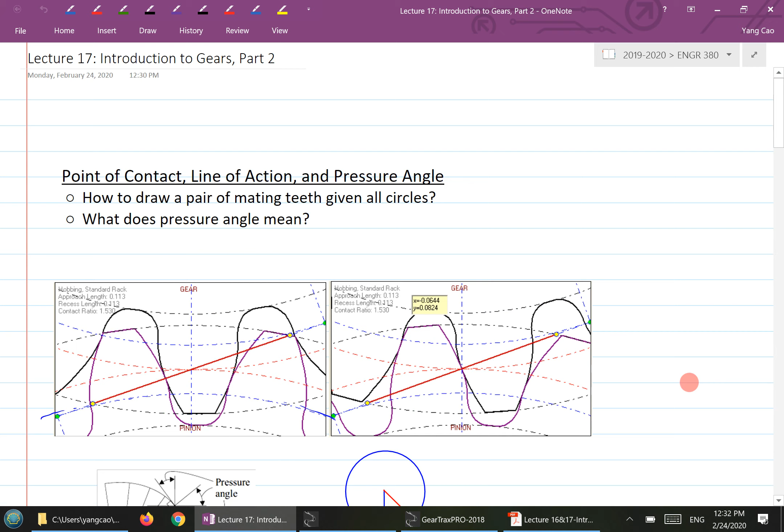Okay, so let's continue the lecture here. We started on introduction to gears, so let's finish this part - continue the introduction and wrap that up.

We talked about the specialty of the gear, because the profile of the gear is the involute profile, and we also talked about a lot of terminologies associated with the gear. This week's tutorial, the TA will help you go through an exercise which is basically to create a spur gear using SolidWorks, so you can familiarize yourself with all the different types of terminologies associated with the gear.

The other thing we'll continue with is the point of contact, line of action, and pressure angle. From this diagram, it's a little hard to tell, but there are 2 red circles - these are basically the pitch circle, and this line here is called the line of action, if you recall. This line of action is tangent to the 2 blue circles here, which are the so-called base circles.

Base circles are the circles where your involute profile will be generated. The involute curve is generated based on this blue circle, and the angle between the line of action and the horizontal line - which we sometimes call the pitch line - gives you the pressure angle. This angle here is the pressure angle. Geometrically, the pressure angle could actually be any number.

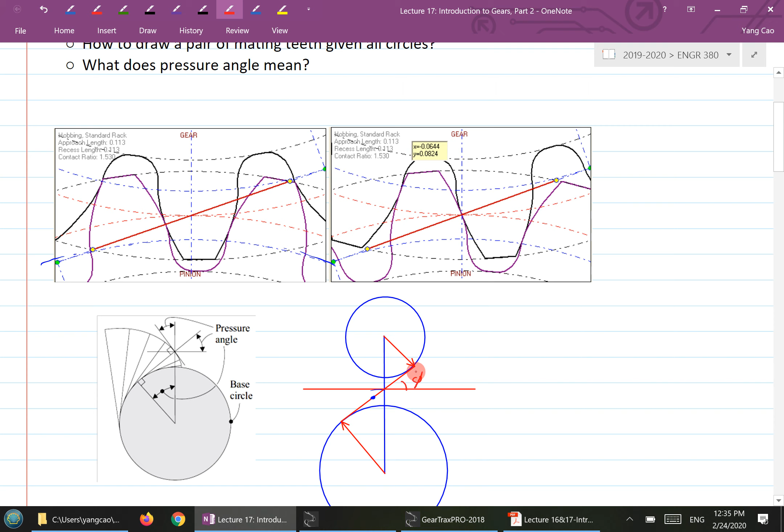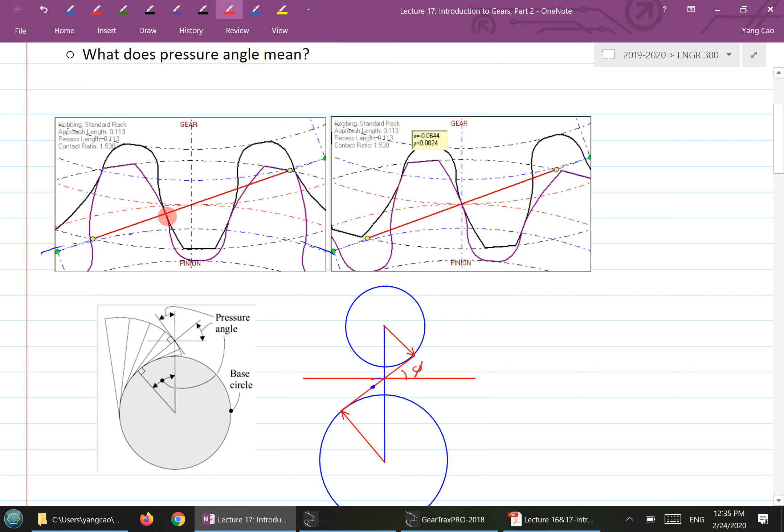Now the other thing is the line of action. Point of contact means where the contact point is between two pairs of gear teeth. The nature of the involute guarantees that the point of contact will always be along this line of action. So basically this point here, as the gear moves, will always be along this line of action.

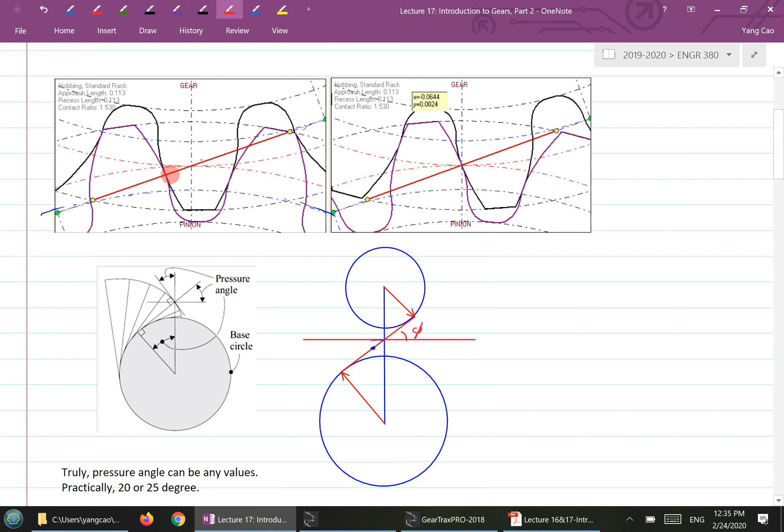So I can show you a little animation here. This is a software; unfortunately, it's not free. So there's this pinion and a gear here. You can observe carefully when the pinion is driving the gear, this contact point will always be along this line of action here. So as it moves, that point of contact is always along that line of action.

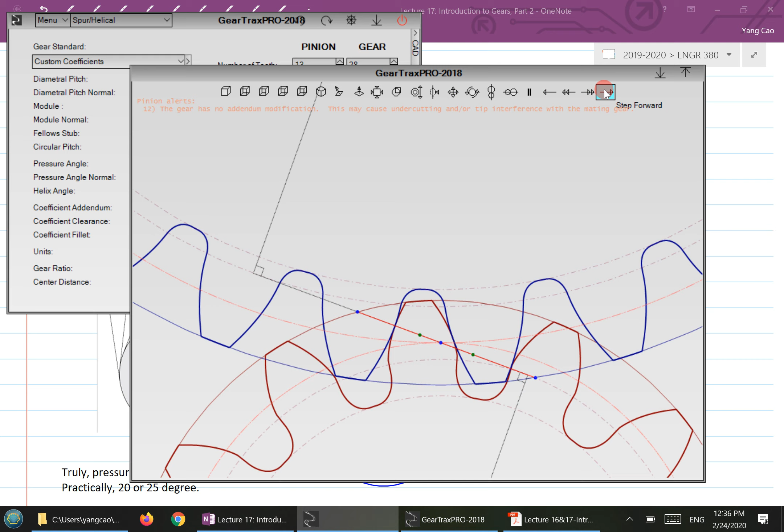So that's basically the nature of the involute profile. It guarantees that the contact point will always be on that line of action. Okay, so these are basically the parts. Another concept is called contact ratio. So when you design a gear, bear in mind this important parameter, the contact ratio.

The contact ratio, using symbol mc, is a measure of the average number of teeth that are in contact. So what does that mean? If you look at this case, we have diametral pitch 10, number of teeth 13 for the pinion, and the gear is 28. So right now at this moment, how many pairs of teeth are in contact? There's definitely these two pairs here. So there's basically more than one pair of gear teeth in contact, right?

So that's the number representing contact ratio. Generally, you want this number to be more than 1.2. If it's exactly 1, it basically means you only have one pair of gear teeth in contact, always. So how do we quantify this?

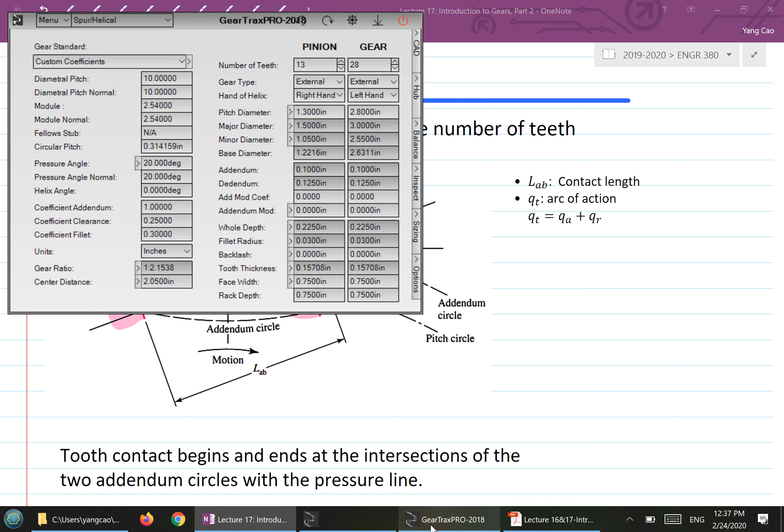Before we give you the formula here, the other thing I think you also need to, maybe I'll talk about this next. Okay. Well, let's look at this for now.

There's an important point here: the intersection point between this big circle and the pressure line, the line of action. Do you remember what this circle is called? Addendum circle. Excellent. The addendum circle is the outermost circle for a gear, and it represents the ending of the involute profile. That's where your gear tooth profile ends.

So the intersection between the addendum circle and the line of action, which is the blue dot here, represents either the beginning or the ending contact point between these two gears, the pinion and the gear. So you can take a look carefully here. For example, at this moment, that's where they start to disengage. And this blue dot here will be the point when they start to engage.

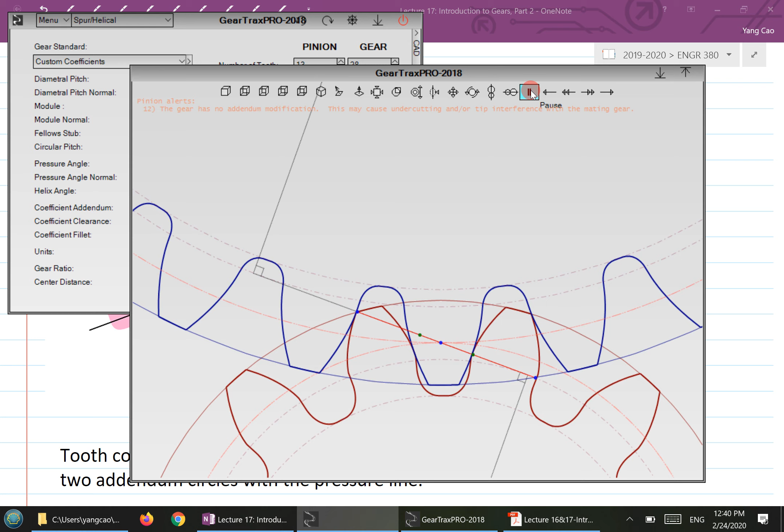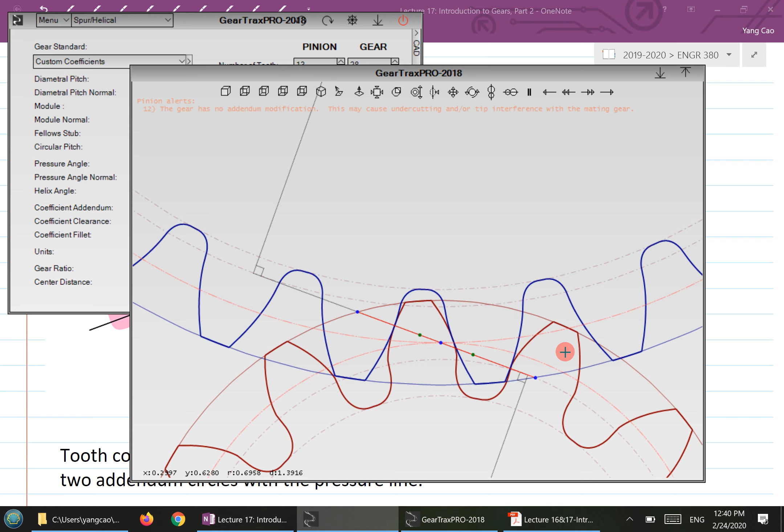So the engaging and disengaging points are the intersections between the addendum circle and the line of action. This is the intersection between this addendum circle and this line of action, and this point is between the gear's addendum circle and the line of action. So these two points determine the engaging point and disengaging point.

So how do I measure the contact ratio? This diagram more or less shows you what I said. Points A and B are the engaging and disengaging points. From A to B, the distance is defined as the contact length, LAB. The other important parameters are the so-called arc of approach and arc of recess, qa and qr. When you add the two arc lengths together, you get the so-called arc of action, qt.

So this QT here, basically MC is defined as QT over small p. Okay? Small p is the circular pitch. So circular pitch is an important parameter, right? When you design a gear, you have a diametral pitch, you have a circular pitch, they're related. Right? So MC is defined as basically this QT over the circular pitch.

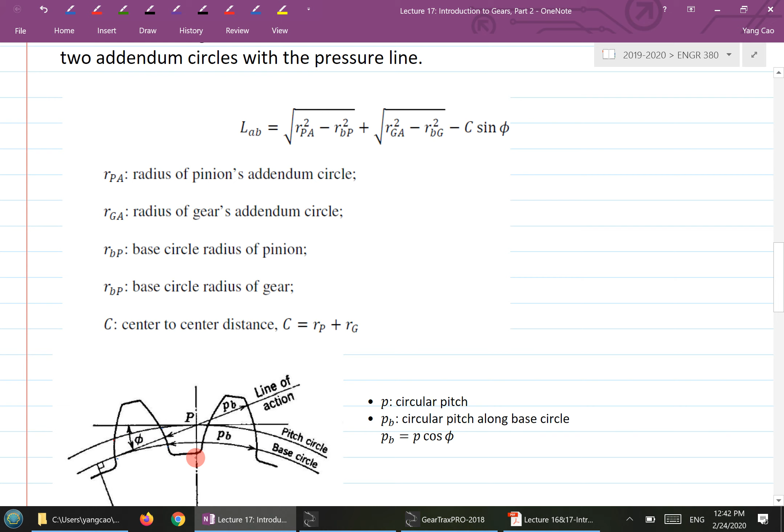Okay. So I think I have the definition at the bottom here. So P is the circular pitch along the pitch circle, okay, from here to here. Okay. You can calculate this line of action LAB using this formula. Without derivation, you can look at my lecture notes. I do actually have a detailed derivation of how LAB is derived. It does require a little bit of geometric background.

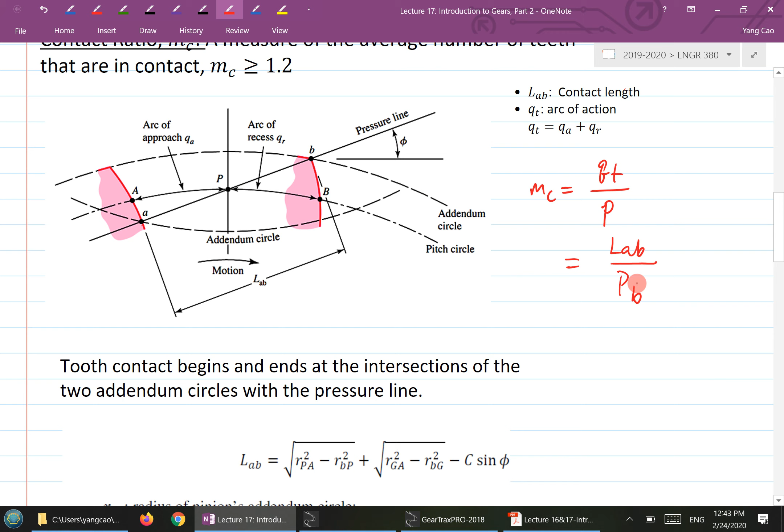Okay. So this is the LAB, which is related to, for example, the radius of the pinion addendum circle, radius of the gear's addendum circle, radius of the pinion base circle, and also the base circle radius of the gear. Right? And C is the center-to-center distance, and phi is the pressure angle. So you can calculate LAB using those parameters, and we can prove that the contact ratio can equivalently be calculated using LAB over PB, and PB here is the circular pitch along the base circle.

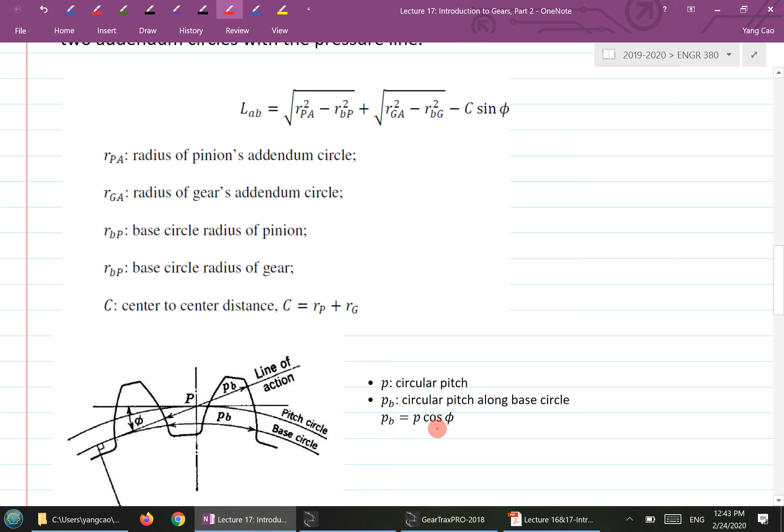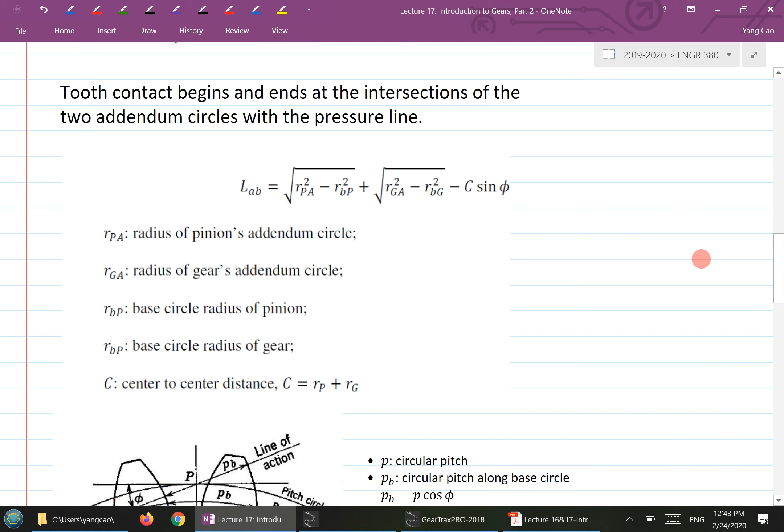Okay. So those formulas, you don't have to always memorize these things. Later I'll give you a template which has already coded all the formulas into it. But it's good that when you look at the formula for the cell, you know where they are from, right? Yeah. So this is the contact ratio, all right? And when you design a gear, you can list the contact ratio, and what you try to avoid is 1, right? As I said, suggested to be above 1.2.

The other concept is called interference. Okay, so what is interference then, right? So let's go back to this animation here. Now I'm gonna increase the number of teeth a little bit, okay, to 16. So now let's observe one thing here. Look at this line of action, which is tangent to the 2 base circles. This is the base circle for the gear, and this is the base circle for the pinion. And the tangent point one is over here, and the other is over here. So that's basically the nature of the line of action, which is tangent to the two base circles.

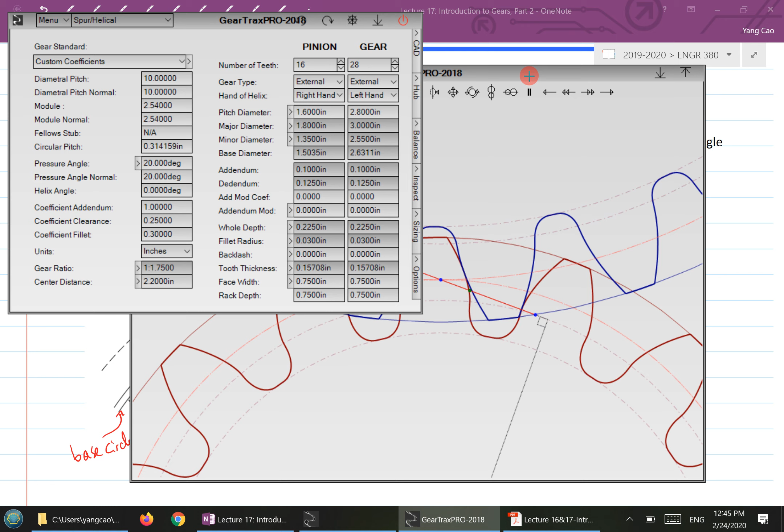And now the two blue dots, as you recall, refer to the starting and ending engaging points, right? Right now, the two blue dots are well within the two tangent points. And we call this the situation where you will not have interference, because when the two blue dots are within the two tangent points, whenever the two gear teeth are engaged with each other, the engaging points are always on the involute profile, which is exactly what we want. You want involute to engage involute. You don't want involute to engage non-involute. So when does that happen, when involute engages non-involute?

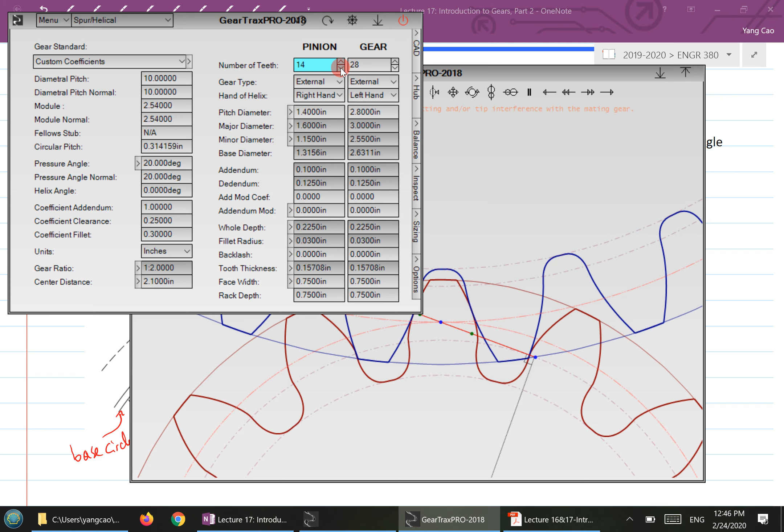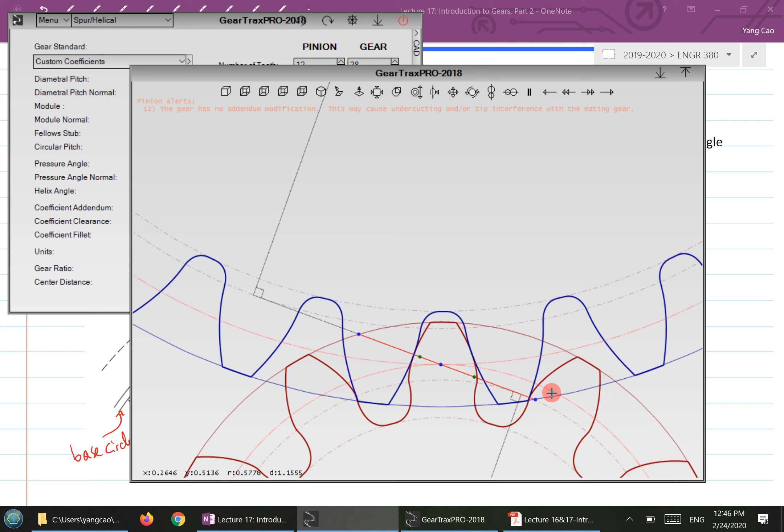If I reduce this one to a certain number, say 12, okay? Now if you watch carefully, where do these blue dots go? They go outside the tangent point now. So at certain points, somewhere around here, maybe a little bit more than this. Yeah, so let's say around here. This part, the blue one, is still involute. But the brown color here technically is not going to be involute anymore, because this is the base circle. Anywhere below the base circle is actually not an involute profile.

So when you draw a gear, anywhere below the base circle, you actually just draw a straight line all the way to the radius. So basically what's going to happen at this location is you have an involute portion of the curve engaged with a straight line, which is the non-involute portion of the curve. So that's what we call interference.

You have all gone to the dentist, probably not all of you, but anyway, you have probably had a filling in your teeth, right? What's the last step the dentist will do to you?

They'll put a blue color of paper and then ask you to bite it, and they look at the color, and then they grind it a little more, right? And ask you to grind your teeth, see if you feel comfortable or not, okay? Until you feel comfortable. So when you're not feeling comfortable, exactly what happens there is interference.

Okay? So part of your involutes is engaged with non-involute. So that's called interference. So what happens when you have interference? The involute portion will always try to dig into this non-involute portion. And as time goes on, basically you have a grinding noise, or you have uncomfortable feelings. That's exactly why, when you design gears, you need to avoid this interference.

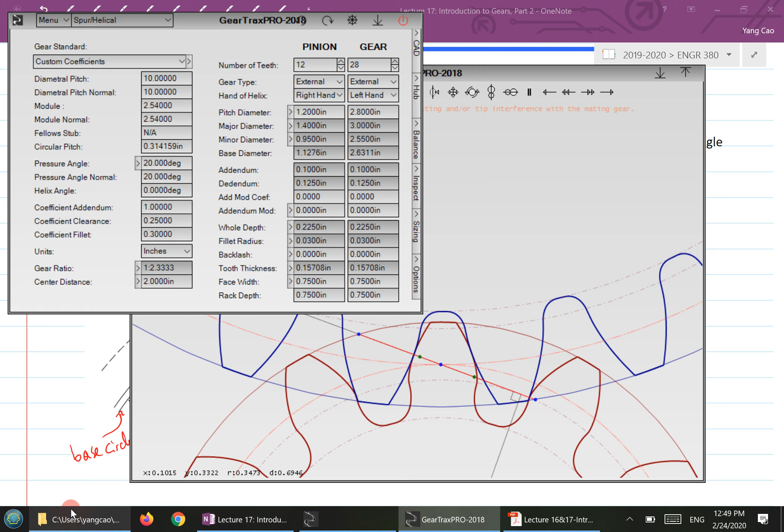So interference is important because you have to avoid it, but you have to know under what situation you need to avoid interference, right? So there are a number of things that you have to be very careful with when you do the calculation for the gear, which is essentially trying to avoid the interference. This is the same demonstration here, but I'm going to write down a few formulas so that you know when you should avoid interference.

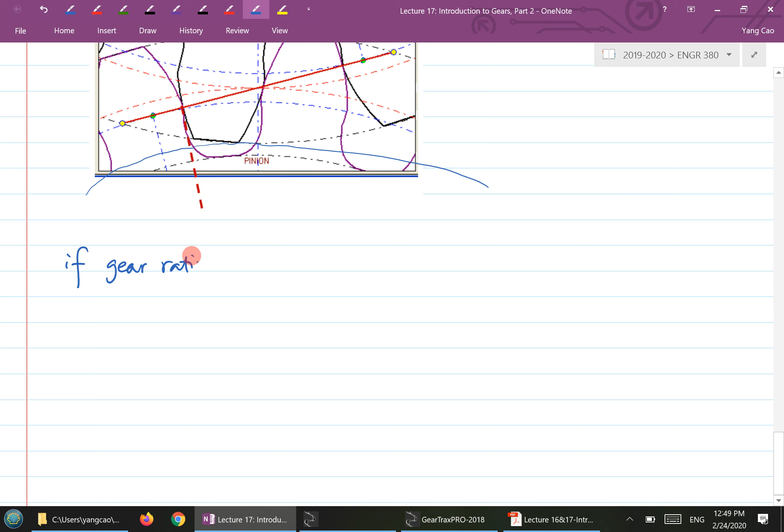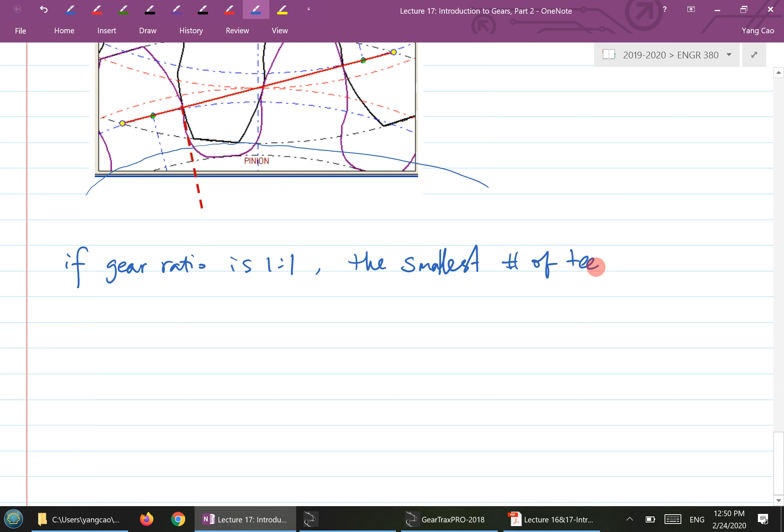If gear ratio is 1:1, then you should know that the smallest number of teeth for pinion is this formula here. In this formula, there are two parameters. One parameter is the pressure angle phi. The other parameter is this parameter k here. So k, you take it as 1 for full teeth.

Okay. There's another type of teeth called stub teeth. Stub teeth is a little bit shorter teeth. Full teeth is the standard size of a teeth. For stub teeth, I can't remember. For stub teeth, k should be 0.8. I can't find it anymore. Okay, you can check the notes. There's another one here for the stub teeth.

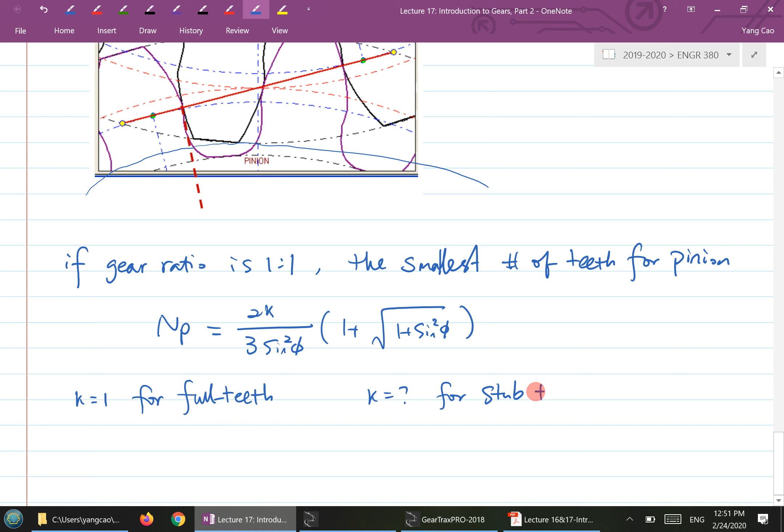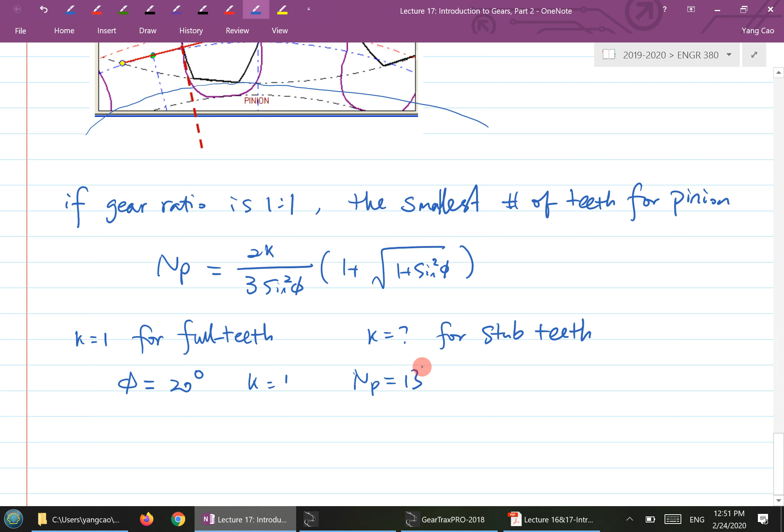So if I plug in, for example, phi equal to 20 degrees, and then k equal to 1 into that, then you'll be able to calculate the NP here, which will be 13. Okay. So this is for gear ratio 1:1. And of course, we typically deal with a gear ratio more than 1:1.

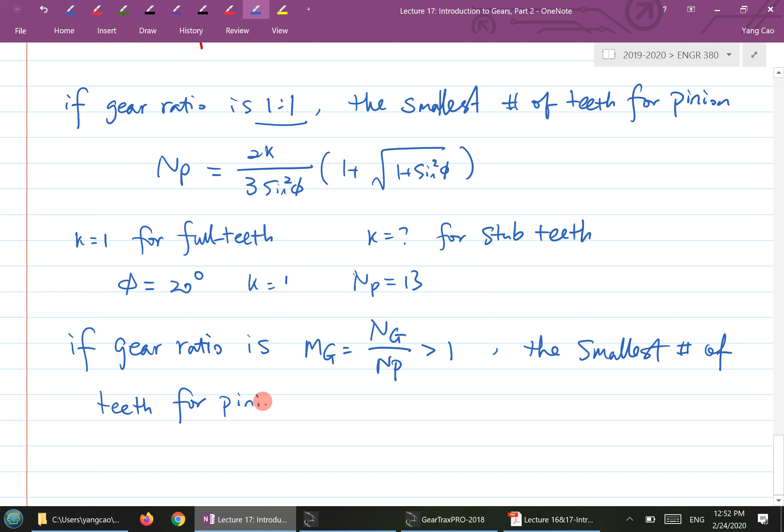So if our gear ratio is defined as the gear teeth number over the pinion teeth number, and of course typically is greater than 1, then we have a different type of formula now. The smallest number of teeth for pinion. So we're talking about here is the smallest one without interference. And this time the formula is changed to

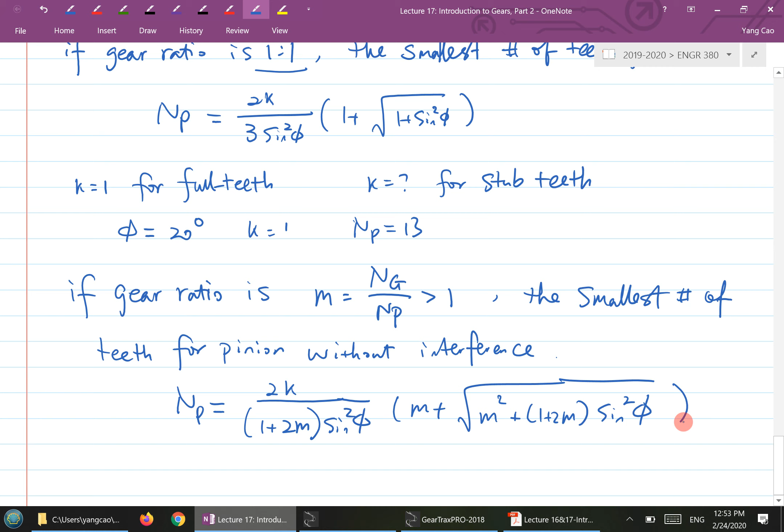so let's just use m here instead of mG. Okay, so it changes to this one here. It's different from that, but this one includes that formula, right? So that one is a particular case of this one. If you set m equal to 1, you should get the same thing.

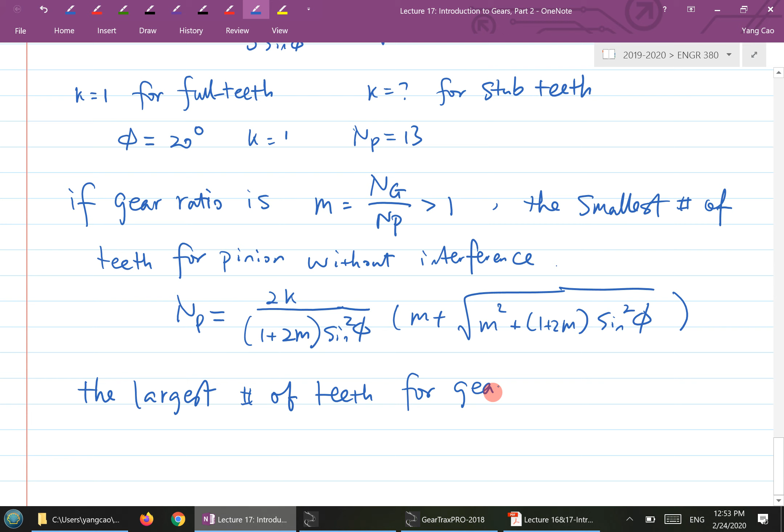And the largest number of teeth for gear, so not just the smallest number of teeth for pinion, but also the largest number of teeth for gear, is NG equals NP squared sine squared phi minus 4k squared, over 4k minus 2NP sine squared phi. So these two formulas, you use them together: what's the smallest and what's the largest number, to avoid interference. So let's see a few examples here.

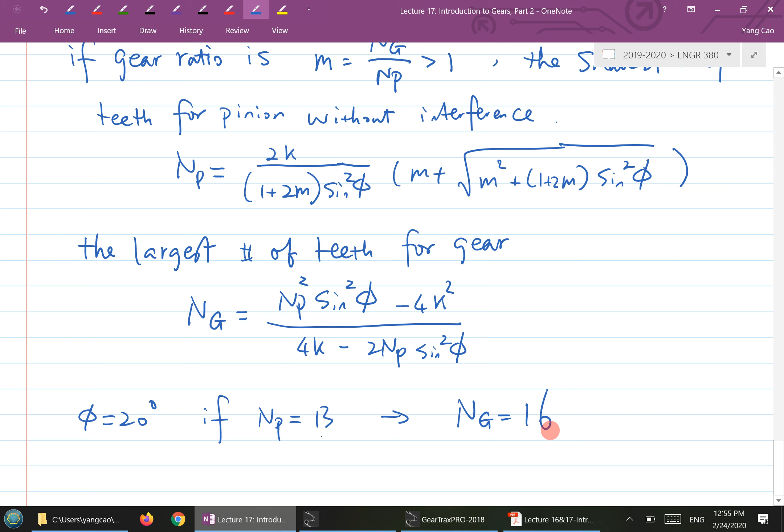For example, if you use pressure angle 20 degrees, and you choose NP equal to 13, then you get NG equal to 16. So you plug NP in here, you get NG equal to 16. So basically, when you choose the number of pinion teeth as 13, the largest number of teeth for gear is 16. So in this case, your largest gear ratio is 16 over 13. Now if you choose NP equal to 14, then you get a different number, 26, right?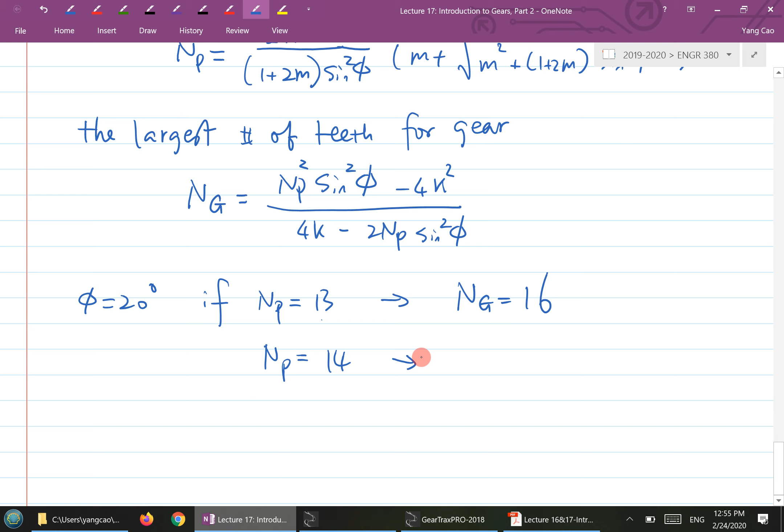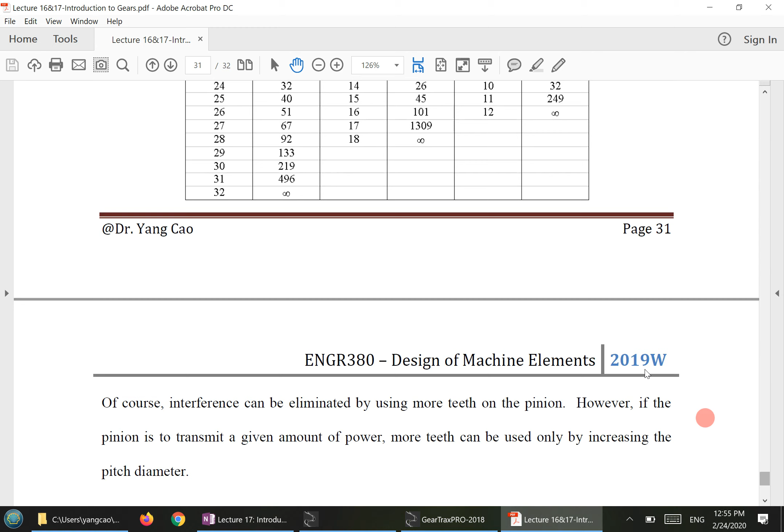So this is essentially what's in the table in the lecture notes, also in the textbook. And you'll have this table here: 14 to 26, 16 to 101. And when the pinion teeth is 18, the largest number of teeth for the gear can be infinite. So basically when your pinion number is 18, your gear ratio can be as large as you want. So you're not going to have any interference at all, essentially.

Okay, yeah. But there's always a trade-off, right? When you have more teeth for a gear, then it's getting more expensive. So it's always a trade-off. Okay.

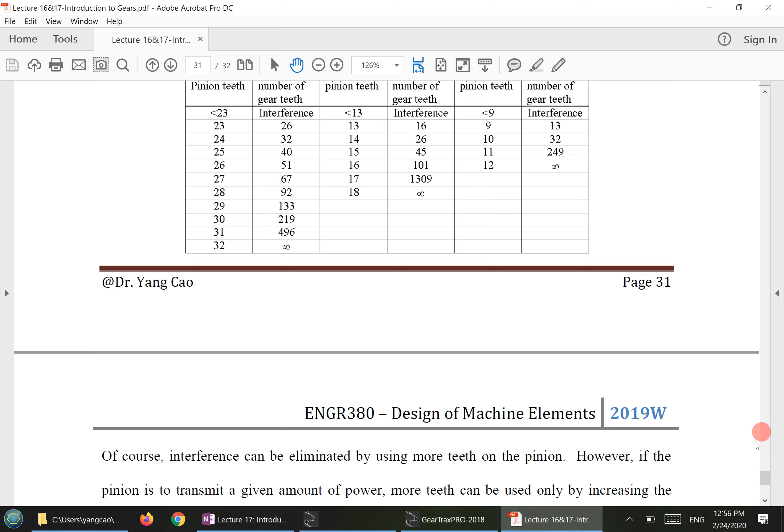So what would be a possible way of avoiding this interference problem? There are a couple ways you can do that. I'll just show you the picture here. Since interference happens only when the involute portion is in contact with the non-involute portion, then if you can have as much involute curve for the tooth profile as possible, you'll have less chance of interference.

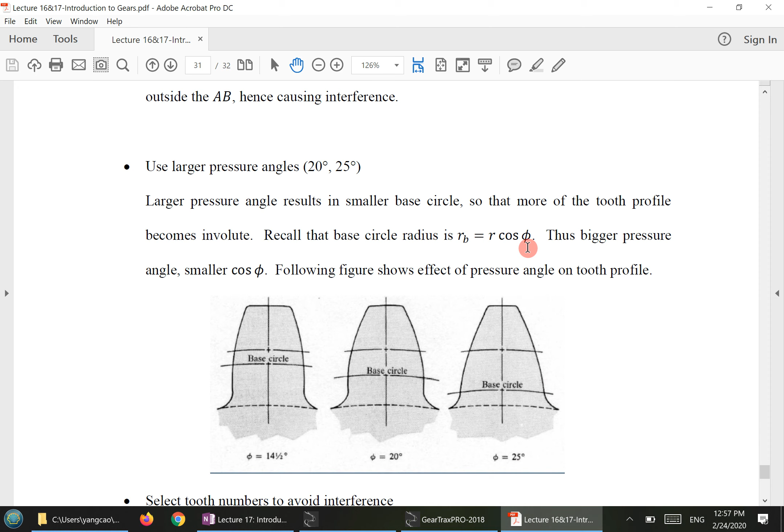So this is the effect of pressure angle. As you have a larger pressure angle, the base circle becomes smaller. That comes from this formula: the base circle radius equals the pitch circle radius times cosine of the pressure angle. So the bigger phi is, the smaller the base circle radius is. As you can see, when you have a 25 degree pressure angle, you have more involute portion than with 20 or 14 and a half degrees.

So basically a bigger pressure angle will give less chance of interference. And then the other thing, which we'll come back to later, is you also want to avoid too few number of teeth. When N is very small, the diametral pitch will be small. If diametral pitch is small, then the addendum A, which equals 1 over capital P, will be too big. The addendum refers to the length from the addendum circle to the pitch circle. So what does it mean for A to be too big? It basically means your teeth are too big, like sticking out a very long tooth, which is not that good.

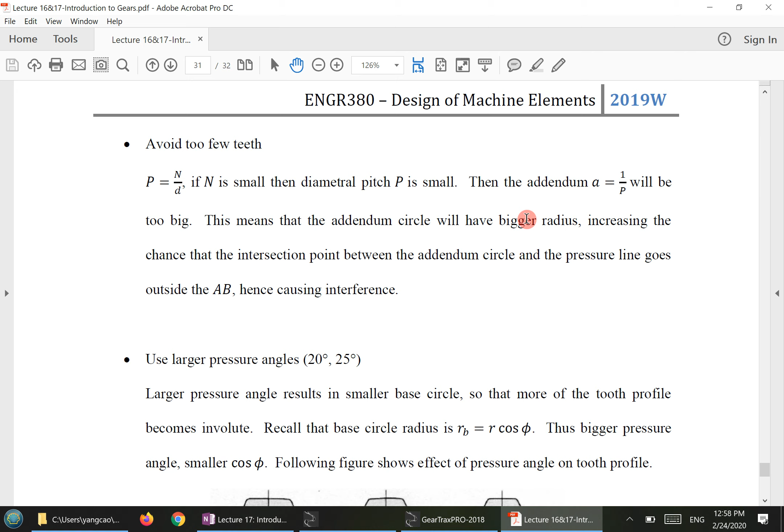But it's good for some other effect though. We'll look at this effect later in more detail when we do the gear design. But these are the two things you can try to use to avoid interference.

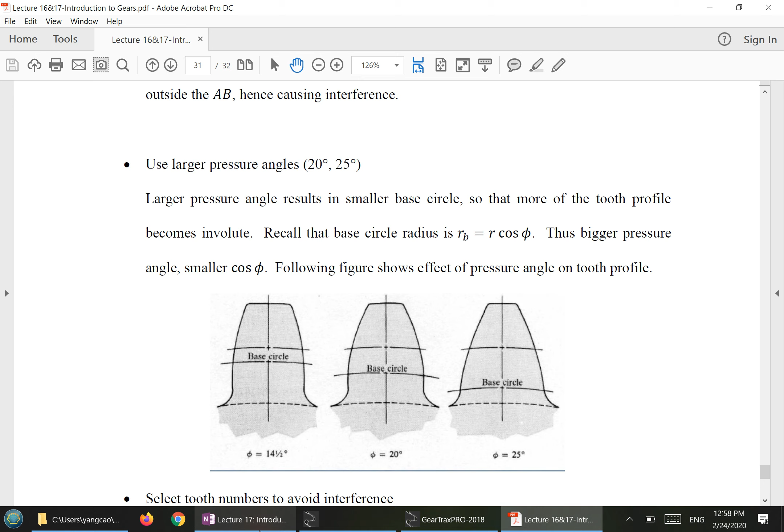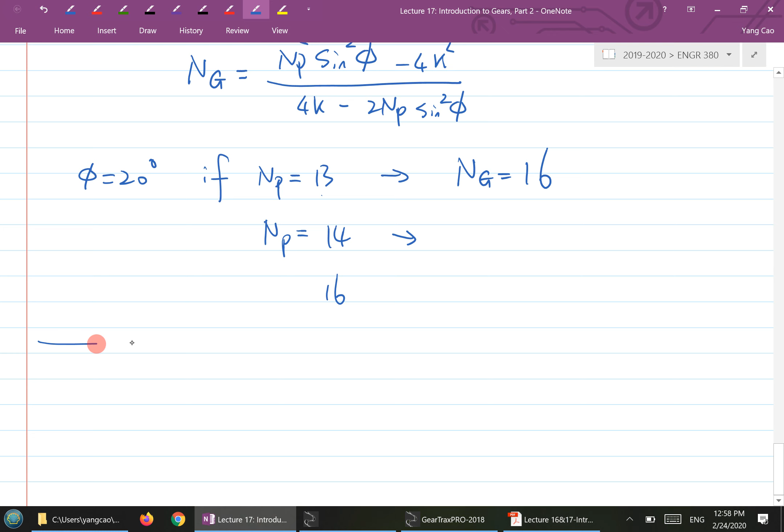All right, so that's some of the terminology. Let's continue on the introduction here. Now I'm going to look at gear train and gear forces. Let's look at the gear train and gear forces.

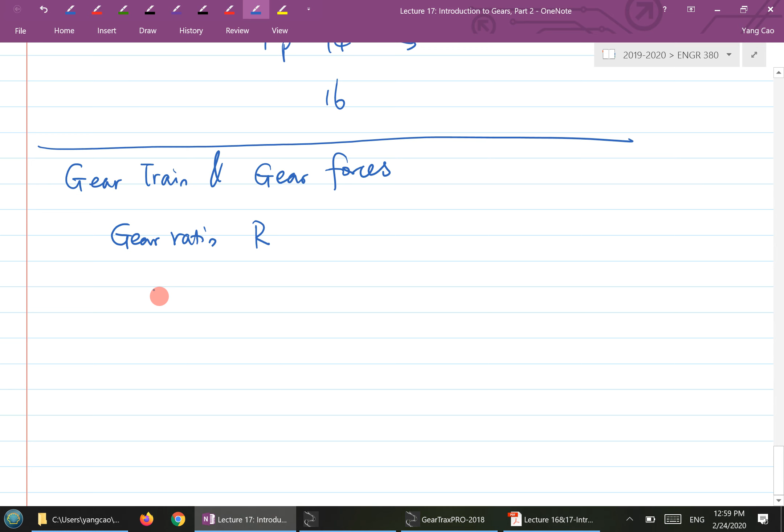So first, a very simple concept: gear ratio R. Now when we talk about gear ratio R, you have to understand that in different contexts, people sometimes use R differently for gear ratio. But in essence, you calculate gear ratio R using either the angular velocity ratio, or the ratio between the number of teeth on the two gears, or the ratio of the radius of the two gears.

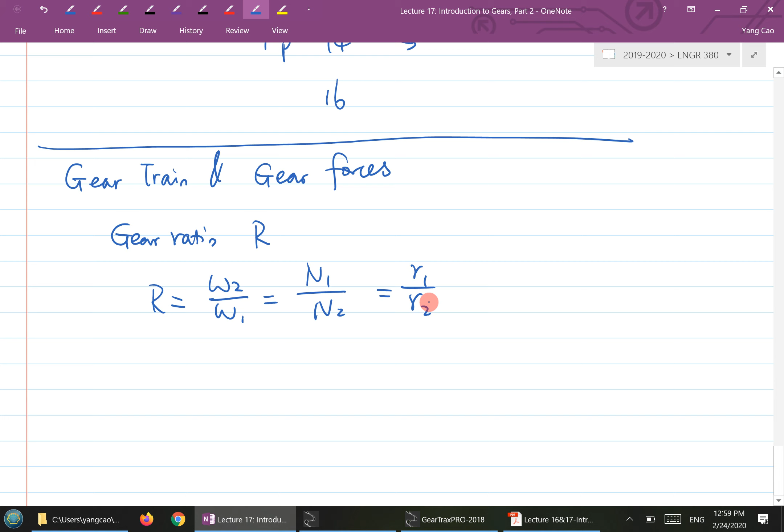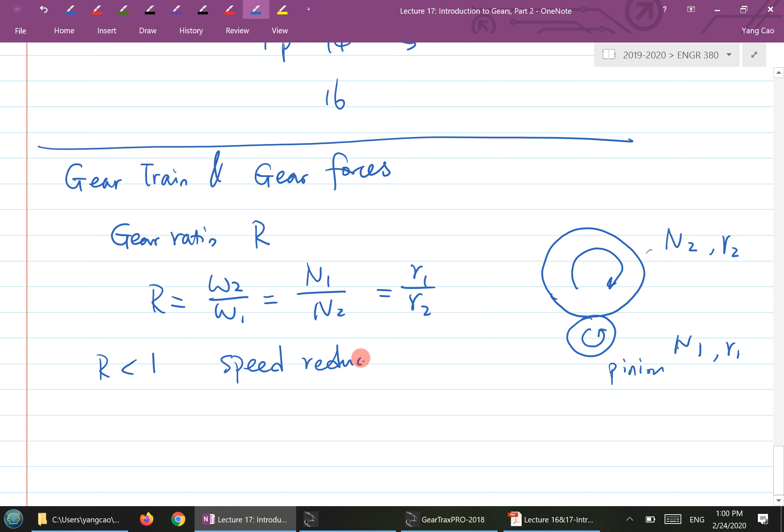When you have two gears engaged with each other, you can draw two circles. If this gear is going this way, then this gear must be going this way. So this smaller one typically drives the bigger one, the pinion drives the gear. So N1 and N2 is the number of teeth on each one, R1 and R2 represent the radius, and omega 1 and omega 2 represent the angular speed. In this case, the pinion is typically less than the gear, so R will be less than 1. That's the convention when you have R less than 1, which essentially gives you a so-called speed reduction gearbox.

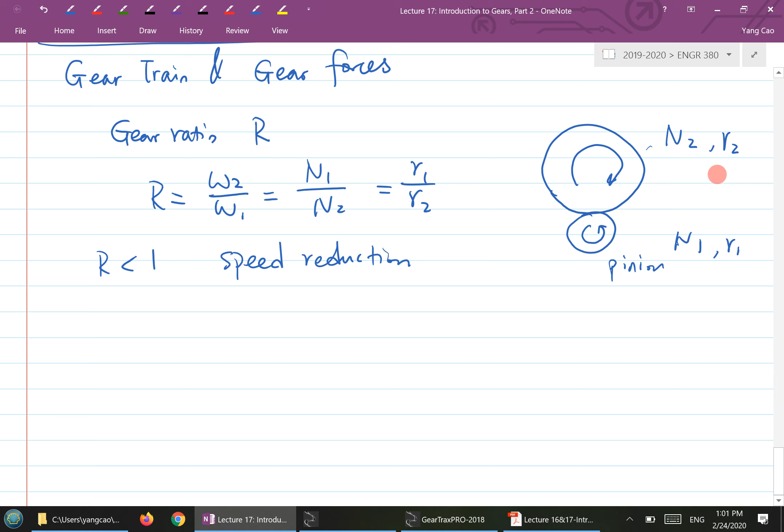However, in the automotive application industry, if you look at some of the manuals, when they talk about gear ratio, they often actually refer to the number of teeth on the gear over the number of teeth on the pinion. So it's actually R greater than 1. So just bear in mind the context you're reading.

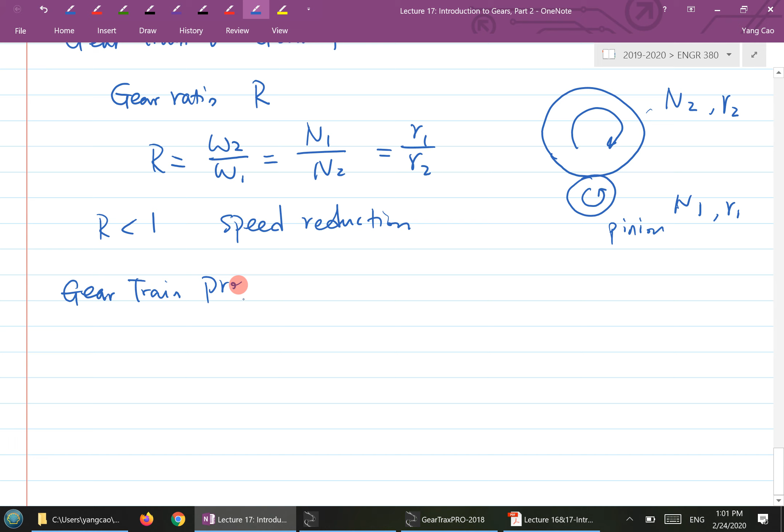So let's look at the gear train property. Very quickly look at the gear train property. I'm going to bring the picture out here.

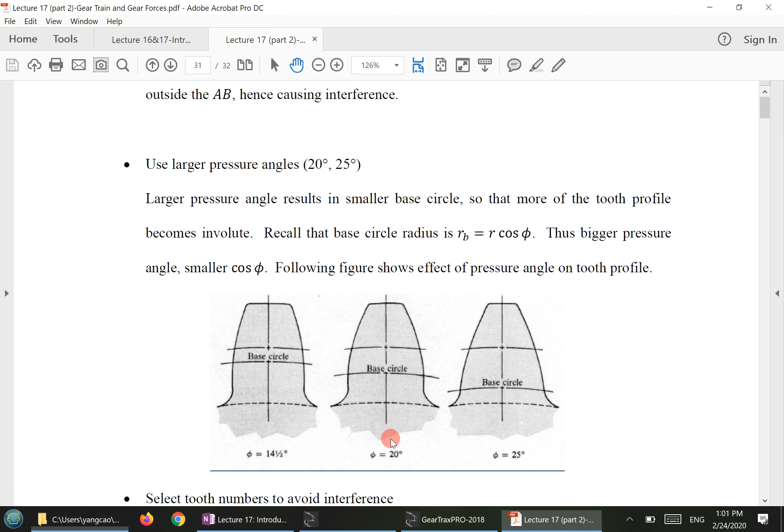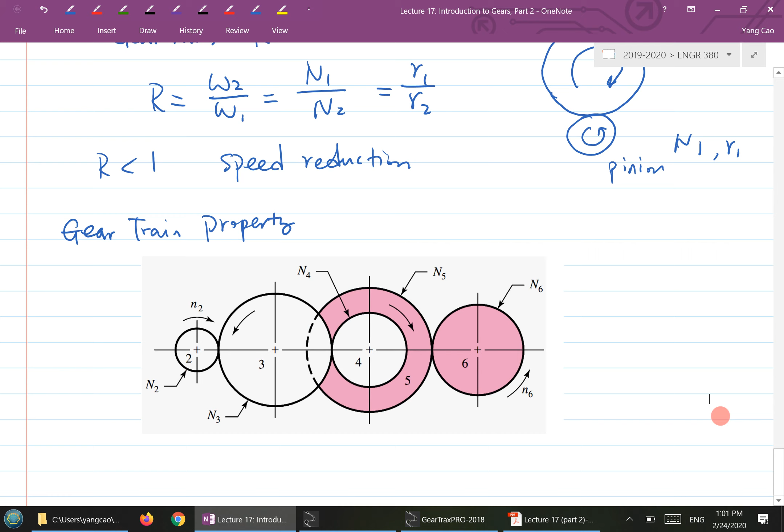So let's look at this gear train here. You can literally draw circles 2, 3, 4, 5, 6, tangent to each other, and that gives you a gear train. Some of the notation is very straightforward.

N represents the gear number, the number of teeth for each gear. n2 represents the angular velocity. Now, when you have a gear train like this, there is a value called the train value.

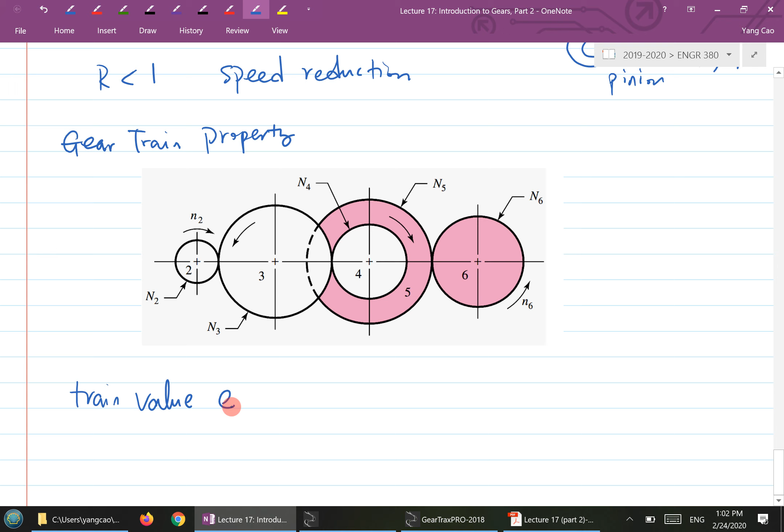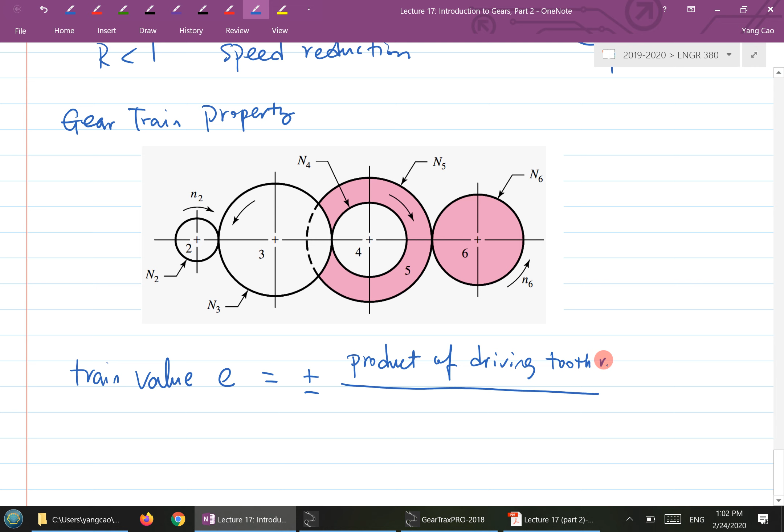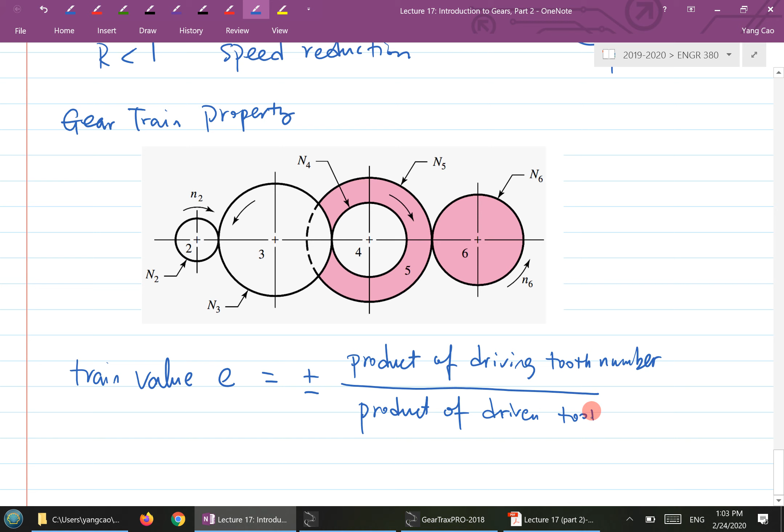This is called the gear train value, E, and E is defined as positive or negative. It's a ratio: the numerator is the product of the driving tooth numbers, and the denominator is the product of the driven tooth numbers. That's how the train value E is defined.

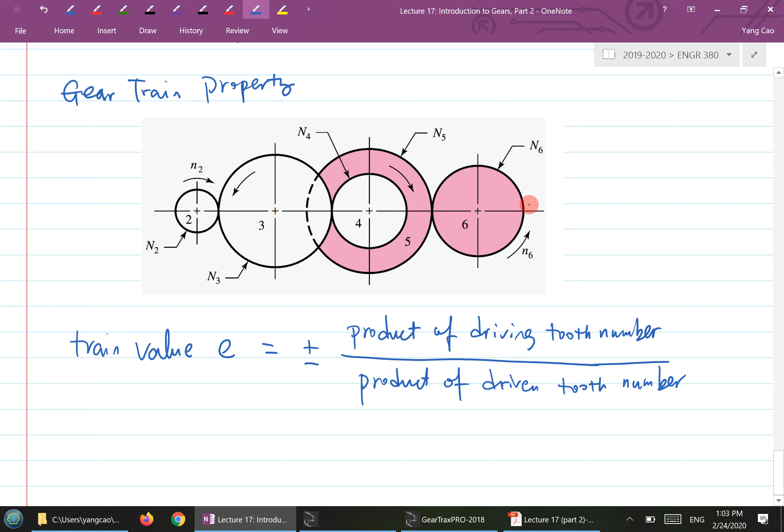Let's take a look at this particular example to find the E value. Using this formula, we need to find which gear can be categorized as the driving gear. Gear 2 drives gear 3, and 3 drives 4. Gear 4 is not driving anything, but 5 is driving 6.

So the product of driving gears will be N2 times N3 times N5. Now, gear 3 at here is not only a driving gear but also a driven one, so N3 appears again in the denominator along with N4 and N6, which are driven gears. So that's the E value.

What about positive and negative? You add that on by looking at the direction of the input and the direction of the output. If the output direction changes from the input, you put a negative sign. In this case, the two directions are different, so the value is negative.

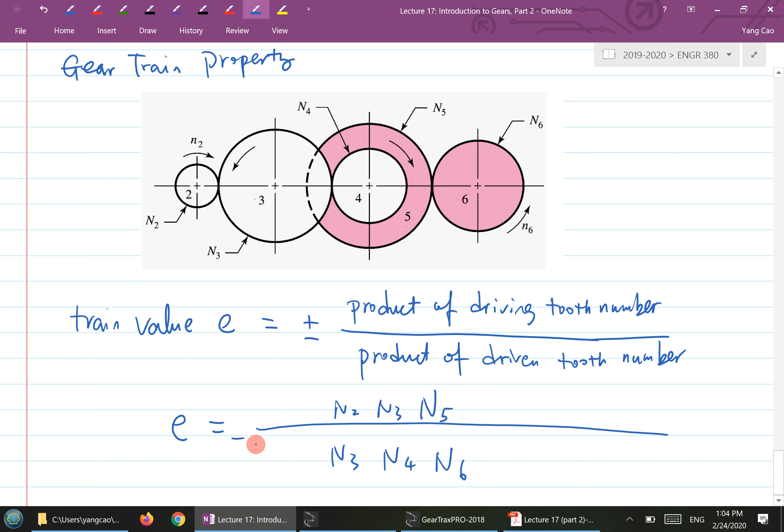So what this E does is the output angular velocity basically equals E times the input angular velocity. That's what this E does.

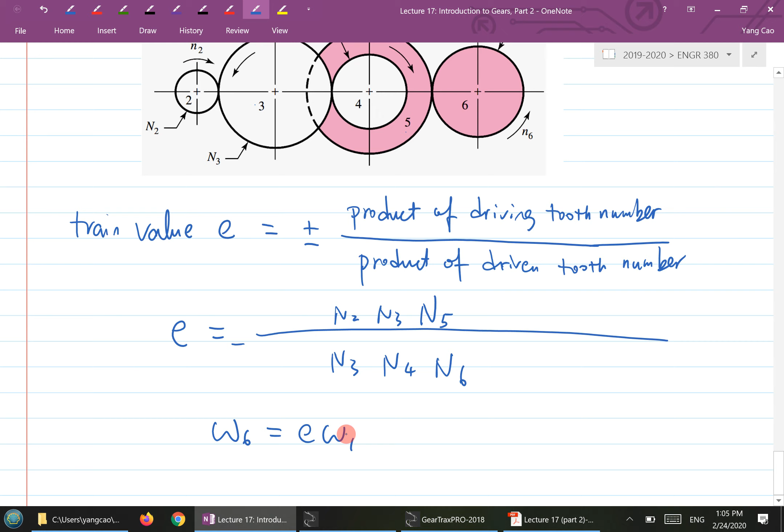One other thing to note is that a very special gear within the gear train is number 3. We call that an idler gear. Basically, the idler gear feels both a driven and a driving force, since it's in the middle between gear 2 and gear 4.

Usually an idler gear functions in two ways. One way is the idler gear changes the direction of rotation. The other way, which is also very important in application, is as follows.

If you have a shaft here and here, with gear 2 and gear 4 already designed, but you don't want to change the location of the two shafts—don't want to make them closer or farther apart—then what would you do if you still want the power input to be outputted here? You need an idler gear in the middle to transmit the power. So that's another application: you can use an idler gear to adjust the spacing between two adjacent shafts.

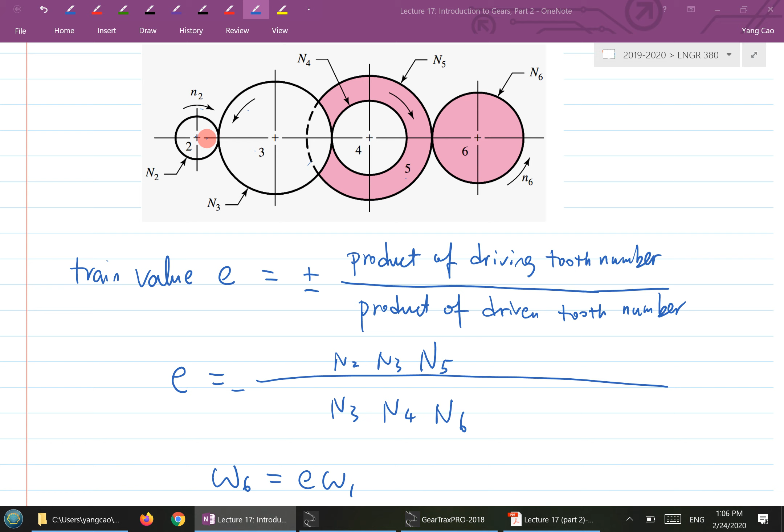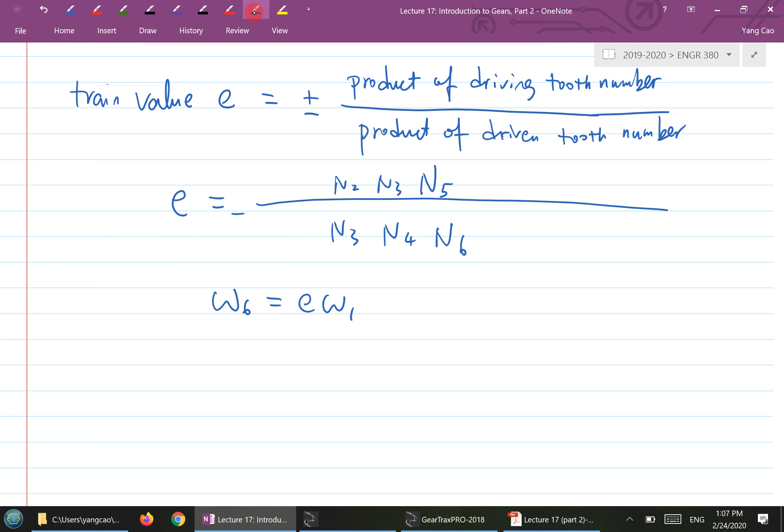That's gear train. Now let's look at gear force. This part is very, very important because it's directly related to the next stage of shaft design, which in part we already did in some exercises before the midterm, because a shaft carries different components, and one component it can carry is a gear. So you need a shaft to carry the gear and transmit the power.

In this case, let's look at the gear force for a spur gear first. When you have a spur gear, you can draw two circles, two pitch circles representing the two gears, and you have the relative rotation like this. That's the pitch line.

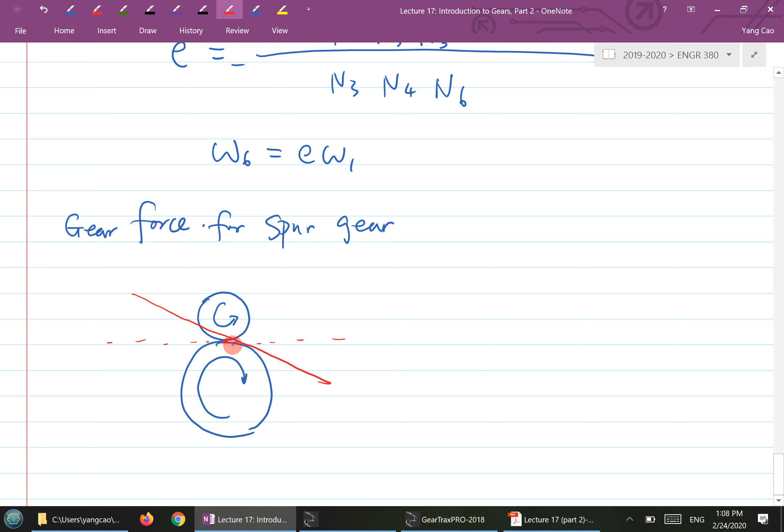Then you have the line of action like this. The action-reaction force, when two gear teeth are engaged with each other, will be along this line of action.

What you can do is draw a free body diagram. Let's draw the free body diagram. I suppose I should draw it exactly the same size, but let's draw it slightly bigger here, okay. So if I have this, this is a pinion here.

In the middle is the location of the shaft. So the pinion, let's say, rotates this way. Now the pinion is driving the gear, and the gear is going against the pinion with a reaction force. So right at this pitch point, you would have a reaction force, which we call W, coming back from the gear teeth.

This W can be decomposed into the horizontal and vertical components. The horizontal one we call WT, the vertical one we call WR. And WR is the one that basically goes through the center of the gear or the shaft. WT is the one that's horizontal.

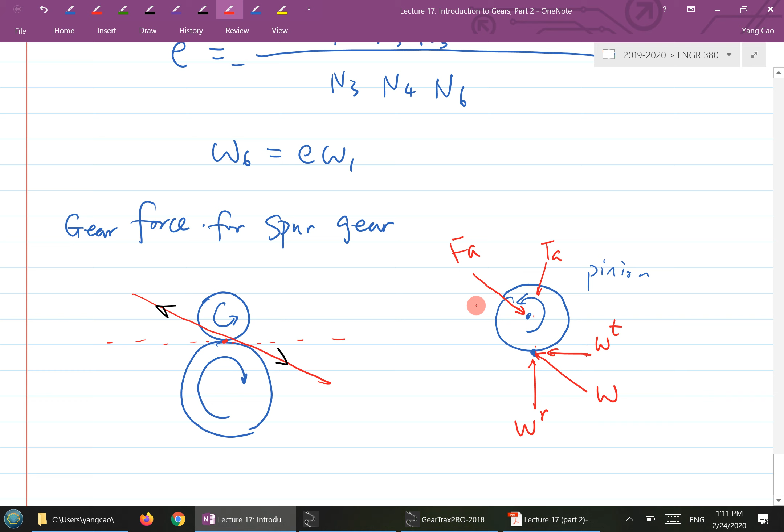So this TA should be WT times this. And to make it balance, because of W, you need a force from the shaft to balance out this W here. So this is essentially the free body diagram for the pinion, and you can draw a similar free body diagram for the gear — same thing.

The most important parameters right here are these three parameters. We call WT the transmitted load. And WR we call the radial load. So the radial load doesn't generate the torque — it's the transmitted load that generates the torque, or because of the torque.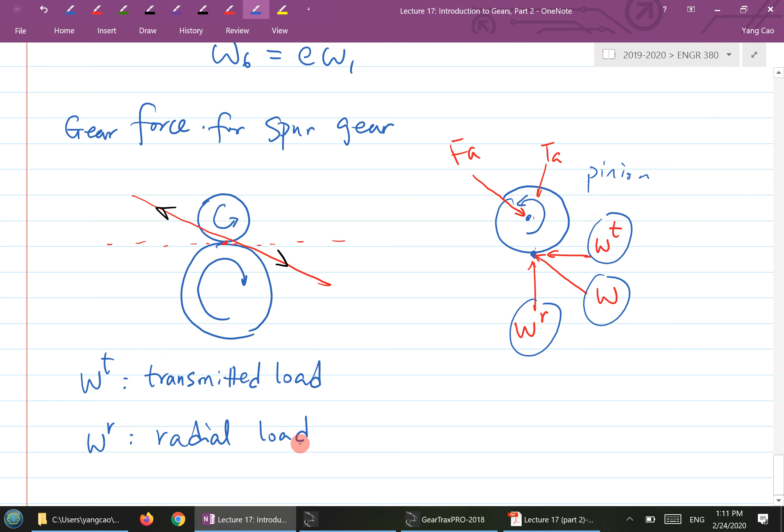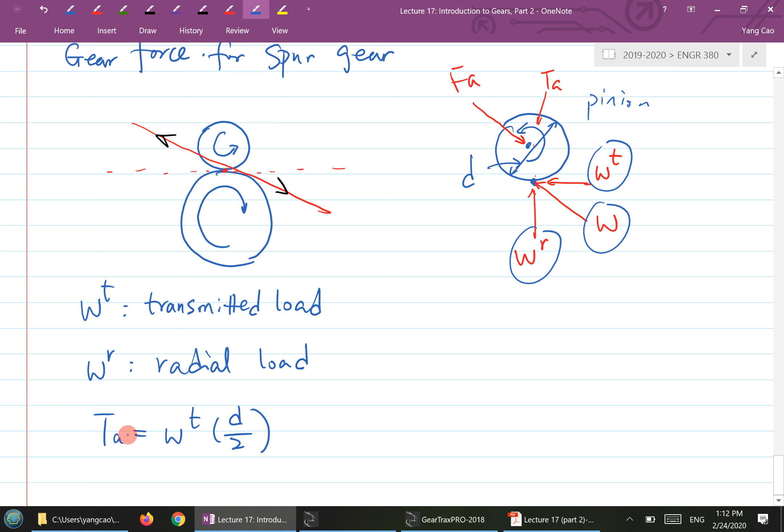So if the diameter is D, apparently your WT times half of the diameter will be the amount of torque at here. So that will be the torque.

Suppose the pinion is the input shaft. Let's look at this in a little more detail. So you have a certain input power, called H. H will be basically the torque times the angular speed omega — so that's WT times D over 2, times omega. Just be careful, my writing is a little confusing. This is W, this is omega. It's kind of hard to tell, so make sure you understand the difference in notation here.

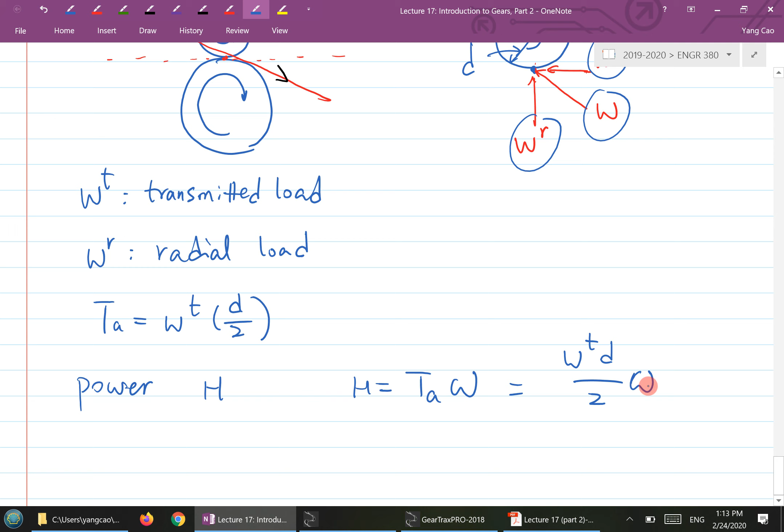And of course, you can always derive the relationship between W, WT, and WR. As you can see, WR equals W times cosine phi, and WT equals W times sine phi. In this particular case, which we'll notice for our next gear, we'll have another notation called WA — axial loading, which is the loading along the shaft. In this case, it's a spur gear, so you're not going to have any axial loading. But next, when we look at the helical gear, we'll see that WA will not be zero anymore.

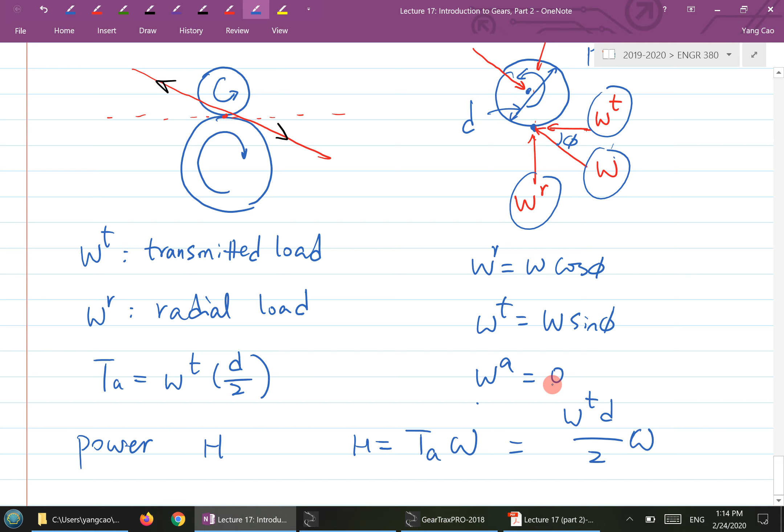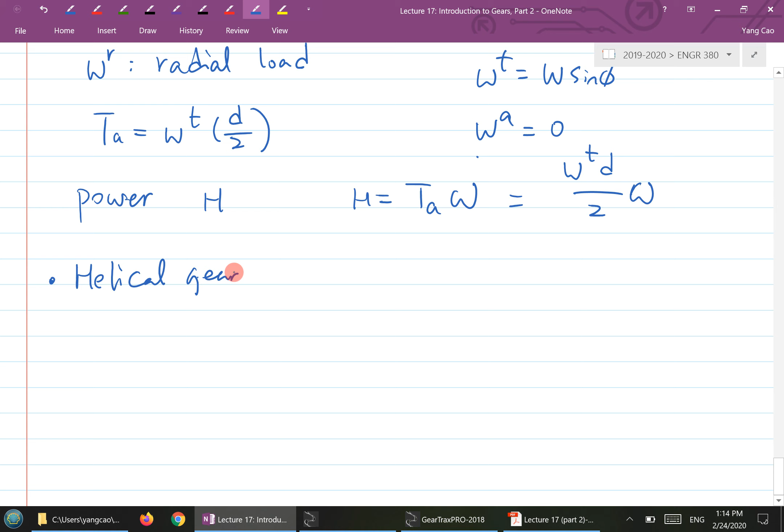That is the spur gear. So now let's look at gear — let's look at helical gear first, and then we'll look at the gear force on helical gear.

So this is where the handout that I gave you comes in handy. This big handout here has quite a few terminologies related to helical gear. Let me go over this with you. Again, when it comes to terminology, it's very hard, especially the first time, to memorize all of these different terms — there's just so many, right? But it's okay, you just have to practice a little bit, and then it's not that difficult.

It's not like solving an integral or anything. First of all, we've introduced the helical gear. A helical gear is the type of gear where the gear tooth is not straight — which basically means, if I have a cylinder, you can always generate a helix, or helical curve, around this cylinder. And the helical gear tooth profile is basically a part of that helical curve. So that's basically what this part of the curve is all about.

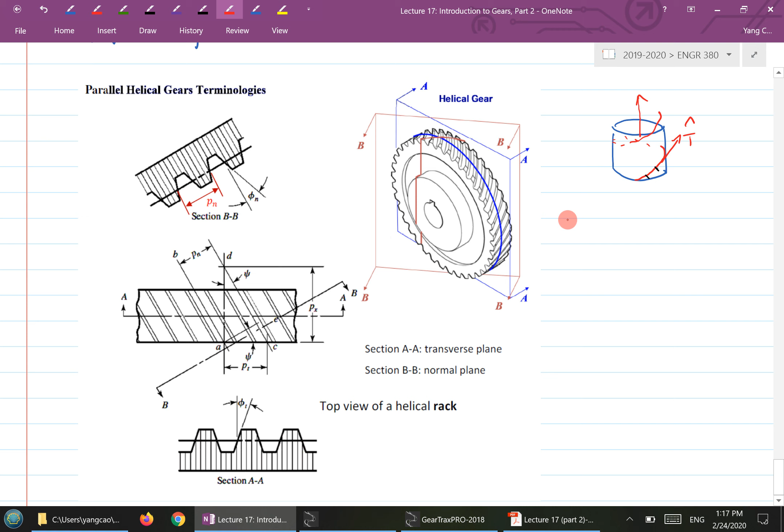This helix angle is how you section this gear using the BB section. So you have this view from this perspective using the helix angle.

For helical gear, helix angle is not a set number like a pressure angle. Pressure angle we have a set number, like 20 or 25, you can choose yourself. But helix angle you can actually choose between 5 to 30, typically with 45 degrees as a maximum angle. Sometimes if you look at a gear catalog, they're probably already manufactured according to certain helix angle.

If you look at it from this BB perspective, you have a view like this, which is basically exactly the same kind of view like A. So it's pretty much like saying another set of spur gear. But you do have two sets of parameters now in these two different views. So what are the two different parameters?

For example, the diametral pitch. Diametral pitch for spur gear, you have only one diametral pitch. But for helical gear now you have two diametral pitch. One in this view, we call this the transverse view, and the other view, A, is the transverse view, and B is called the normal view. So in these two views, you have two different diametral pitch.

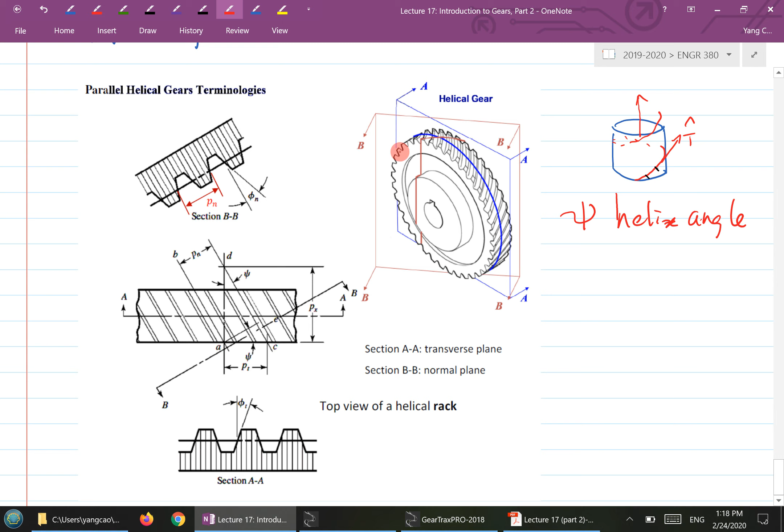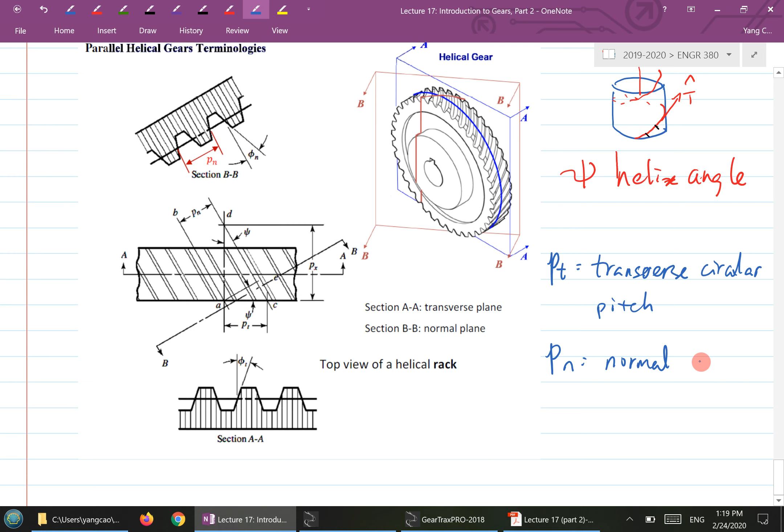This is where I'm going to write down some of the parameters, just to indicate the difference between the two different views. We use small letter P for circular pitch, but now I have a subscript small t, so basically this will be the transverse circular pitch. And then you have a small p with a subscript n, so that will be the normal circular pitch.

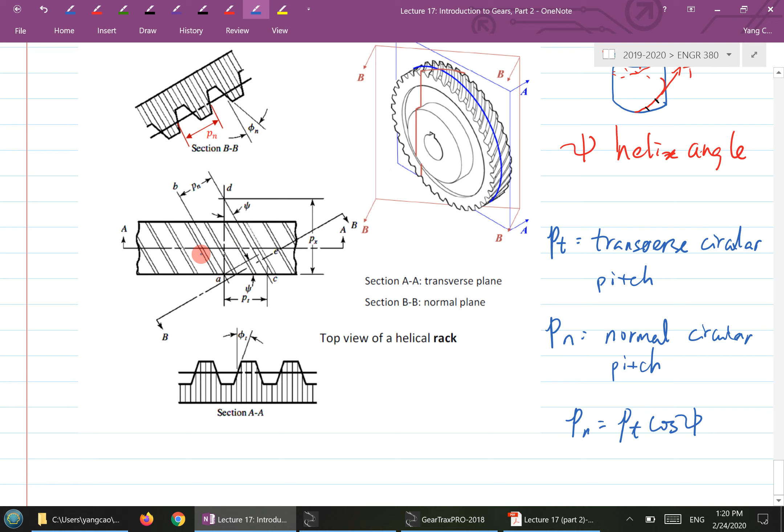These two are related with the helix angle. So small pn equals small pt times cosine of helix angle psi, and that's actually quite easy to identify from here. By the way, the section view from this one is from a helical rack, so this is a rack here instead of a circular gear. A rack is when the radius of this becomes infinite.

Another thing is the so-called axial pitch. Axial pitch refers to the distance between two corresponding points along the axis of rotation. This is basically from A to D, so you have this so-called axial pitch. We use px, and px equals pt over tangent of helix angle. And then capital P, capital PT, capital PN, they're the so-called transverse and normal diametral pitch.

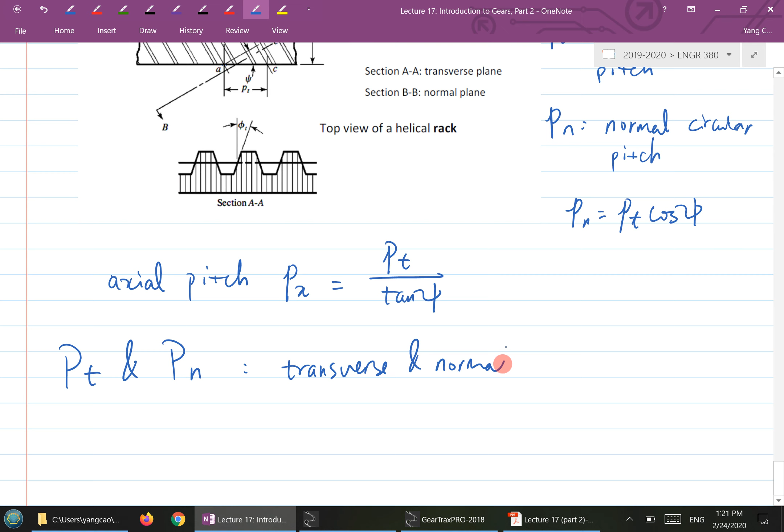Let me write down here, so we're almost done. Capital PN is equal to capital PT over cosine of helix angle.

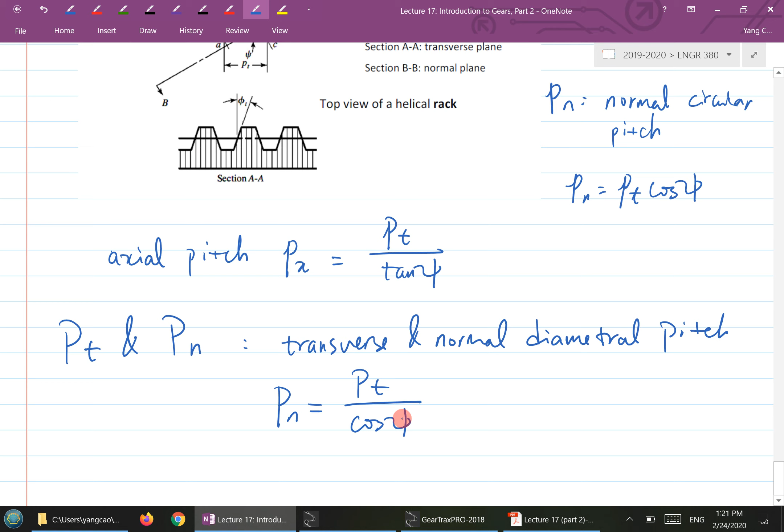Similarly, the pressure angle also has two sets, one in the transverse plane, one in the normal plane, phi t and phi n. They are not the same. Always remember the pressure angles are not going to be the same, and you can relate this using this formula here. That will be the last one I can write.